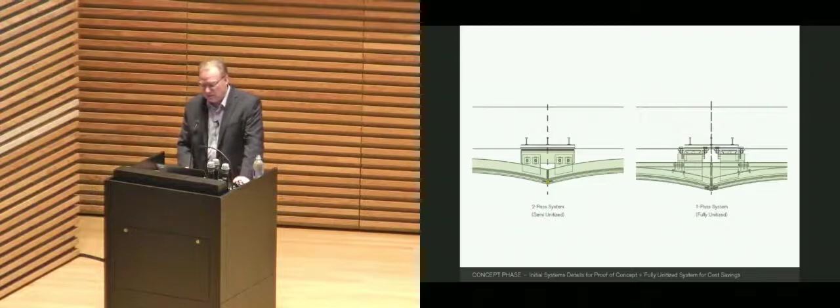And then the task downstream was a question of, can we do it? How do we do this? Which is an interesting thing, to actually have a very clear goal. And then the process is a different way of thinking about something than exploration, throw it away, exploration, throw it away. Here, the question is, okay, is it viable?

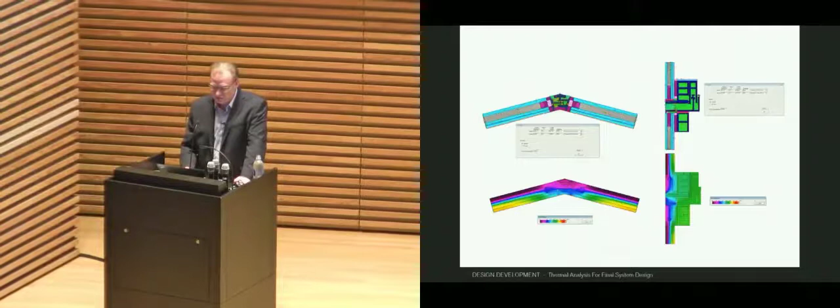What's the greatest risk? When you're working with a developer project, frankly any project, but developers are particularly attuned to this question, is where's my risk in this process? Because I do not want to get to the end of the process and have everything blow up for me. Either it doesn't work or it's out of budget. You've got to manage that whole process.

So you may be accustomed to the expression of Lloyd Hunt. Remember Lloyd Hunt? Lloyd Hunt taught us the 3 Ps: proprietary, performance, and prescriptive. Those are 3 forms of contracts, and 99% of the facade world actually works on the basis of performance-based design in the building envelope world.

And that's why the industry is so complicated, because you as designers and consultants are basically designing something that you hope to God a contractor is going to fully engineer and realize on the other side of the table, exactly fulfilling all of your aspirations. Now that is a dark art, to do that kind of handoff and transfer and to get everyone working.

Which is why things like design assist have come into being, where you basically say, in order to do that, we need to push the contractor further up in the process. Of course, the CM and GC, they're guaranteed, they're at the beginning of the process, and we all need them right there on almost any job now. Whereas the facade specialists, as contractors, are moving up towards the design development stage, and sometimes earlier, in order to get a kind of certainty in terms of the project delivery.

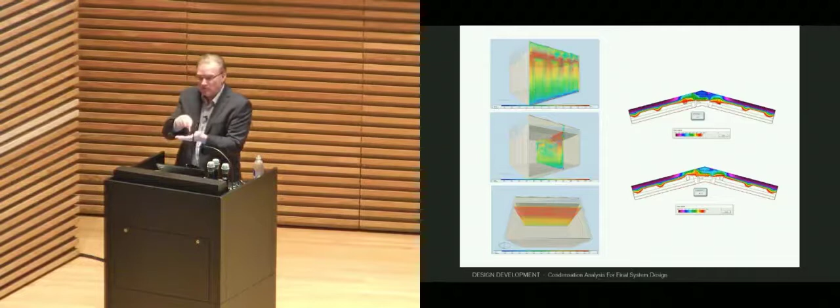But prescriptive design is like really old school. It's like 1950s curtain wall, when someone actually drew a line and they said, build that. And I don't really care if it works, but you're going to build that because that's what you're being instructed. Don't think about it, just go and make it. And then you kind of respect people for making it, hopefully well.

But these days, of course, you need all of the performance. So we, as a company, we're like a little industrial design company for envelopes. 75% of our work is for owners, but 25% of our work is for contractors and facade fabricators, whereby we do full prescriptive design and engineering.

So we just flip that into the normal working for Tishman Speyer, and we just say, okay, we are going to fully engineer this piece of glass. We just say, okay, how many layers? What is the energy performance? What is the aesthetics? How many coatings do we need? What are the sealants, the tapes, the laminates, everything?

We're going to figure it out one-to-one as if we are the sign and seal engineer of record, and we are going to comply with energy code, and we are going to do everything right from a fabrication standpoint. Meaning we're not relying on the contractors to tell us what the glass should be. And then working with Rex, of course, we figured out exactly what kind of coatings we want.

We have two. We have a hard coat silver that goes right to the edge on surface 2. The inboard is laminated. And then we have a sputter-coated low-E coating on surface 3 to meet the energy performance. By the way, the coating is the same coating that Dan Graham uses on his sculptures. Anyway, so moving right along.

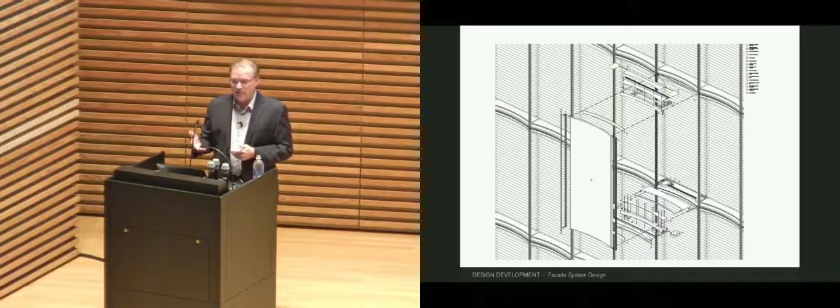But if you have a multi-story building with unitized assemblies, the economics of installation mandate that you do a single pass installation if you're working for a developer. If you have a big budget with an owner-occupied building, maybe you can do something a little bit more laborious, but single pass install. So how do you do a frameless glass panel where the glass is actually doing the engineering spanning work while having it fully framed with a drained joint pressure-equalized interlock system?

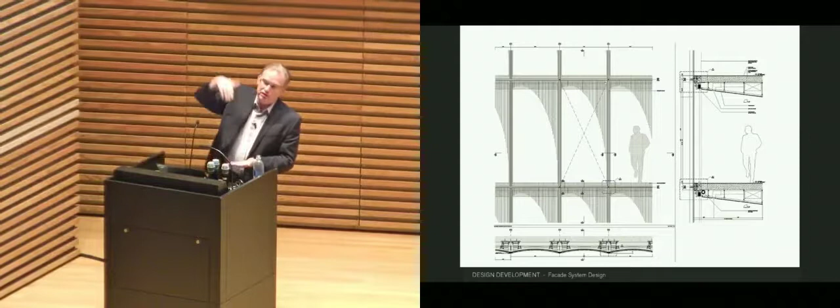And so this is not a frameless system, but it is mullionless. The mullion implies that the mullion has a profile that is actually resisting the wind, and the glass is only spanning sideways to the mullion. In this case, the glass is actually doing the work from top to bottom, which is not much of a miracle. We're doing like 30, 40 foot frameless panels now on specialty projects. But to do it on a commercial office building is pretty unusual.

And then the frame is actually along for the ride. It's bonded to the glass, not the other way around. But it is still a 4-side fabricated frame. And the key thing for us is that the tight tolerances of the fabrication of aluminum, which is basically plus or minus 1 to 2 millimeters, means that the glass tolerances for curved glass, which are looser, can be absorbed within the frame, but not at the joint. Right? So the frame, when it goes in, is perfect.

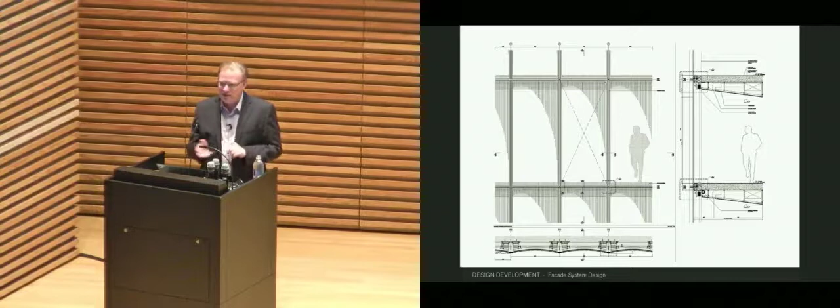The glass is softer. And this won Mr. Phillips, the Dark Lord's approval. He was like, that is the shit. Because you've saved me money, you've guaranteed the aesthetics, and no one's ever done it before. So this is great.

So here we have our joint. Now, one thing that you'll notice is this little thing here. It's one of the fine aesthetic details of this entire project. This is more Mies than Mies. With a unitized curtain wall, you typically have a reveal between the two halves. That's the I.M. Pei, the Foster way of doing things.

It's like the panels come together, there's an edge adapter, and then there's a shadow reveal. This is like, no, we're going to occupy the gap with a knife plate of shiny metal. And somehow it's the continuation of the curvature of the glass to that point of manifestation. Super sharp.

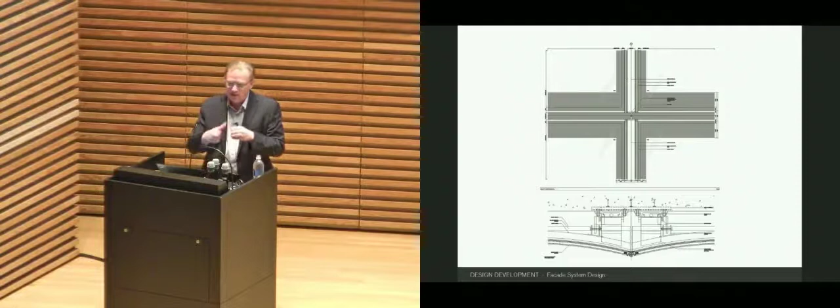That's what we want. So the unitized joint is actually deferred to one side. And of course, that knife plate is overhanging the way the joint works at a really tiny scale. I only have one slide like this in the entire presentation. I won't leave it up long enough for you to read. But now the moral of the story is, how do you take out that risk?

Now that we have a hypothesis, and it is a hypothesis, of a kind of unitized, mullion-less, prefabricated, curved glass, base-supported wall assembly. Most curtain walls are hung, right? This is base-supported. Now, with our prescriptive engineering for the glass, we went out to every curved glass manufacturer we know in the world, and we know them all, and we basically say, here's the product we want.

We want you to make 2 panels, identical, mount them in a frame, and we will pay you. How much money do you want to do this? We don't want to owe you anything. And they asked for $5,000 or $26,000 or $50,000. We didn't care what they were asking. And Tishman Speyer was enlightened enough to just pay them all. And then we went around the world to basically China, Spain, Italy, to look at these different pieces.

And theoretically, they're all identical, right? It is exactly the same coatings. It is exactly the same dimensions. But of course, those in the glass industry might appreciate that the anisotropic effects are different, the quench marks are different, the roller wave's different, the overall global warp and distortion in the panels is different, the quality of the butyl on the edge seal is different, everything is infinitesimally different. And it's not to say any one of these companies can't do a fantastic job, they can.

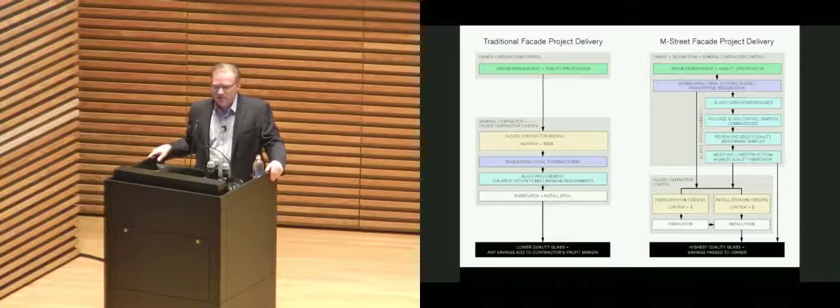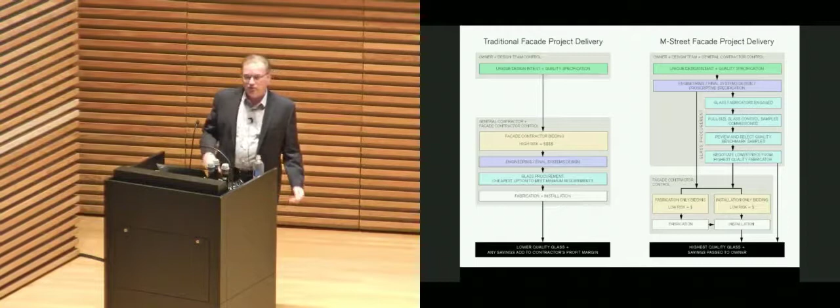Anyway, the fact is we got a number from $42 to about $86 a square foot. And then Tishman Speyer with the CM and with us negotiated it down to $36, and we gave the job to Tianjin Northglass. And they had the best quality glass, best quality with quench marking and all that jazz. And so then that 36 was put in our pocket, and then we bid the curtain wall. We went all the way through now to a fully conformed set of 100% construction documents.

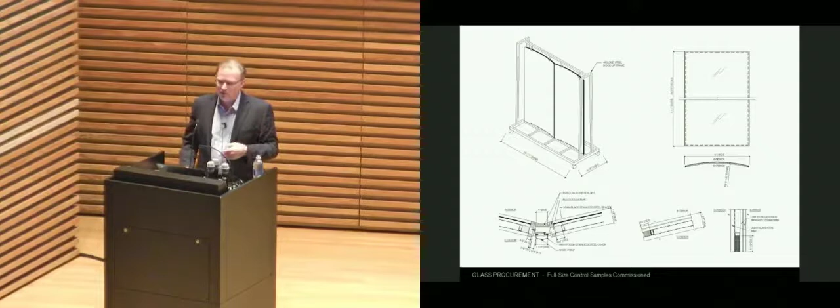Because we understood, we talked to various fabricators beforehand, would you still bid this job? Will you bid this job? Are you interested in this job? And by the time the bidding actually came out, we had 7 fabricators willing to bid the fabrication of the actual panels, and all 7 were willing to accept the novated glass supplier at the price. However, their margins and markups on that price were theirs. You want to put 15% on that, or 50%, or 100%, or 200%, that's your business.

You want to price their commercial non-performance, you want to price in delays to the project, you want to price in extra breakage, whatever you want, you can do that. That's your prerogative. And so we bid it out, and Alberto de Gobbi's relatively new company, Fabrica, won the bid, and in classic way, they're the lowest price, also with the most intelligent responses. We gave up a couple of details, like we allowed the frames to go slightly behind the back of the glass panels where the spacers were.

It was actually kind of useful because it's a nice point where you can actually dovetail an interior partition with the glass at that point.

So furthermore, to save money, the glass novation worked. We got the supply for a number that we couldn't believe. And then because Fabrica is relatively new and they didn't really have a pipeline of work in Washington, D.C., there wasn't really a benefit commercially to them doing the installation.

So the CM had very strong installer relationships and basically negotiated a separate contract on a cost-plus basis with an understanding of certain risks. They're indemnified against certain breakage, replacements, and things like that. So basically you wash it out, and you're breaking it up into 3 components, but delivering the final fabrication engineering as single source turnkey.

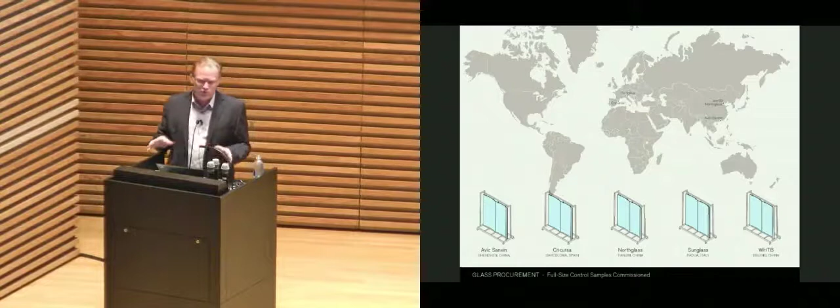Meaning even though we engineered it as though we were going to sign and seal it, they are still retaining an engineer in Washington who is going to sign and seal in that jurisdiction. So it's still, in a sense, performance-based delegated design, but virtually on a prescriptive basis. But if you actually look at the shop drawings, there's still a lot of evolution. To give Fabrica credit, even the bracket innovation that went on is pretty interesting.

So I'll just run through, now you've got the whole story. You can just look at this like a storybook. So this is a bending tempering furnace, which automatically CNC curves glass, which is now up to 3.3 by 18 meters globally, if you're interested. And we're pushing for projects now that have 18-meter long glass, if we can get it done.

So here's some of these rolling racks around the world in different factories. Basically the exact same thing. There's Josh and my guy Patrick.

And then, after we got the job done and went to Fabrica, we went through the shop drawing process, and now we are at the performance mock-up. So this is our performance mock-up now. You can start to see that knife plate manifest at the middle. The corner also has that similar detail. And then just a whole series of photographs showing the fabrication sequence.

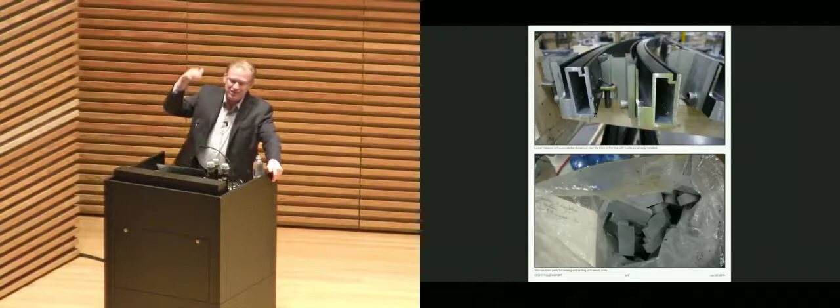Important to recognize that because it's a single spanning piece of glass, the structural silicone at the top and the bottom is about 2.5 inches thick, which they whinge a lot about the curing time of. But of course, it generates a couple. It's almost like you can imagine the engagement on a glass balustrade. So the couple at the top actually thins out the glass. So the substrates are still only 866. It's actually still very economical in terms of substrate thickness for something that's spanning unsupported over about 11.5 feet.

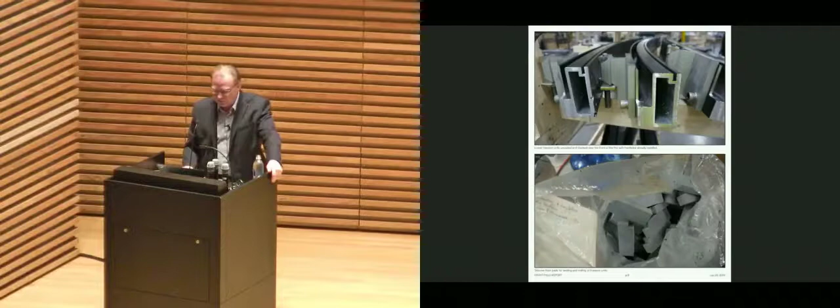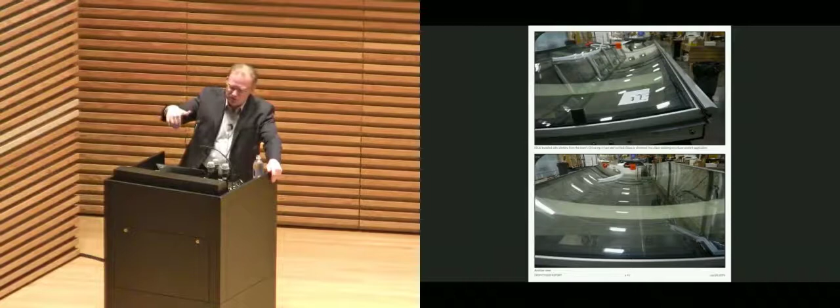But at the bottom, we have a stack joint. So even though the vertical is mullionless, we do still have a horizontal continuous stack joint that is fully drained. And what's interesting with the panel when it goes in is we have a very deep slide-in bracket that is torsionally stabilized. So when you first install the panel, it actually is rotationally stabilized against falling out.

Because most panels are hung. You hook them on, and then they're stable. This one, you're actually slotting it in the bottom, then dead loading it, and then dialing up the dead load afterwards. Anyway. So you can see the panels, 4-side, fully fabricated, curved glass. And then we're starting to get to the installation on site.

This is our beautiful bracket. Those are the curved horizontal extrusions with these slotted-in brackets that sleeve in so they don't rotate. And then you have the set screw which dials in vertically and locks in the dead load adjustment. Corner panels, typical brackets. And then the first real panel installations.

Now, while I'm showing you all these images, one of the crazy things about this project is Tishman Speyer assembled 3 sites, one of which was the CBS Face the Nation studios, which had to experience completely uninterrupted operations during the entire construction of the project. How do you do that? So there's a big site, there's the CBS studios, and there's another site. That site fit the CBS studios.

So you knock down that building, you build a new building, you move CBS overnight, which includes the new facade. The new facade was actually put on in this little localized area of the building. And then the rest of the building was demolished and built up over on top of it and meshed together. And then the facade was installed seamlessly as though the other building never existed as a separate building. So this is the kind of stuff we do to enable it. There's the CBS component of the project, built and installed first in advance of the rest of the building.

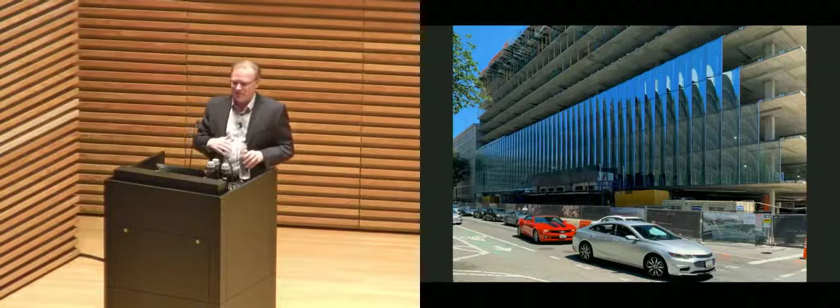So that was the CBS component over here, which has now been swallowed up by the rest of the building as it continues across. And I think the renderings were pretty convincing, but this is one of those few buildings where the optics of the real thing are just like, the fidelity is way beyond the rendering capability, and the real thing is nuts. In a way, the thing reflects the street and the clouds at the same time. And the glass actually starts to look kind of double curved.

I'm just going to leave you with this image for a moment because it's kind of unbelievable. Because of course the concrete is post-tensioned and it's coming to a thin slab and the ceiling is tapered up to that little point that actually fits within the stack joint location. And then of course when you see the corner, you get that incredible transparency of this frameless unitized system. And I've just never seen anything like that before actually.

Except for that, you know, what was that kind of speculative model that Mies van der Rohe made? Of that beautiful translucent thing, it's like, yes, nailed it.

And we should say, before we move on to Grace Farms, that the building was 100% pre-leased prior to construction by a single law firm above pro forma target. Yes, and that gets you the next project and the next project and the next project.

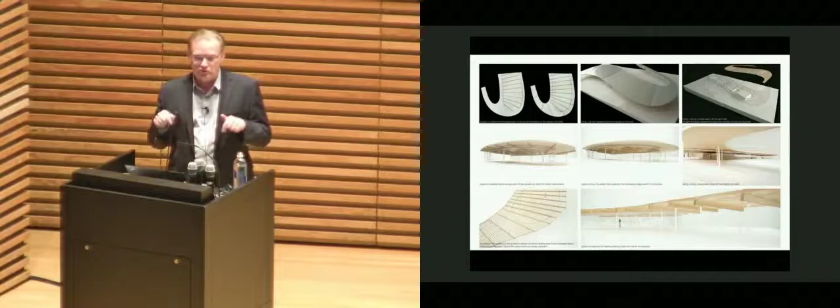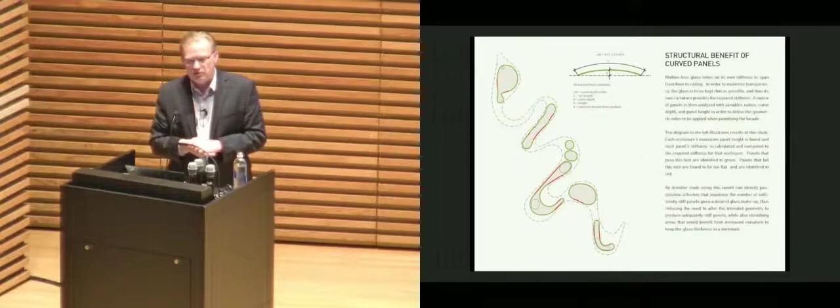It is insulated. Of course, we need the U value to prevent condensation, but we also have geothermal on this building, and we have perimeter heat coming up around the entire edge of the glass for comfort. So that's actually something that's working really well for us. Without the geothermal, it wouldn't make so much sense. So getting back into the glass. There's a radial curvature for the strengthening of the glass. That's all a good analysis, but I don't want to talk about that.

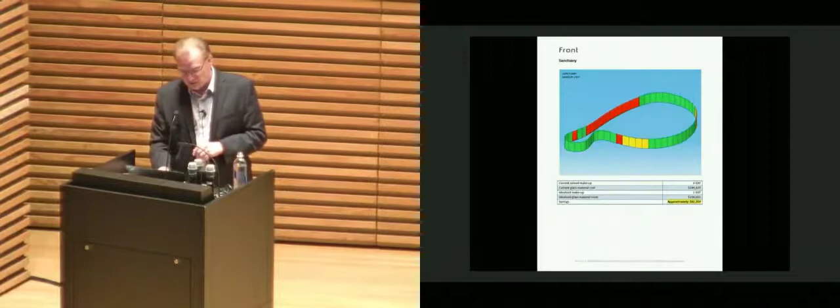What I want to talk about is this. If you were to just approach a glass fabricator off the shelf and say, I want a frameless piece of glass, like 13 feet tall, my wind loads are 2.5 kilopascals or whatever, this is probably where you would end up. Because what people are normally calculating is the heat buildup and the expansion of the air cavity and the in-plane forces on the structural silicone. And so what you're actually looking at is heat buildup here, pushing sideways, putting this into shear, and the length of this structural silicone is actually governed by the shear strength.

So temperature variation in here is critical. If you haven't actually analyzed it, everyone would default to the absolute worst possible case. You've probably heard about thermal stress analysis for thermal shock.

In cold climates, you have a direct sun onto glass, the glass heats up, and the rest of it's ambient cold. The whole thing fractures by itself right across the middle. It's also another reason why we never use annealed glass in cold climates, because of thermal shock, unless you analyze it, unless you really are in control.

And the great thing about low iron glass with no coatings in it is that it absorbs very little heat from the sun. The sun just goes right through it, or the radiation goes right through it. So the glass itself is not actually heating up that much.

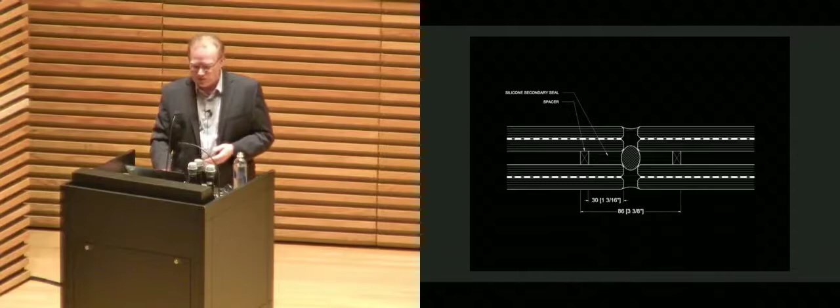We did very detailed finite element modeling to demonstrate what kind of performance this achieves. That dimension there is 86 millimeters, and the actual dimension here is 30 millimeters for silicone weather seal, structural silicone, and the spacer. It is the narrowest profile ever achieved for a frameless insulated glass.

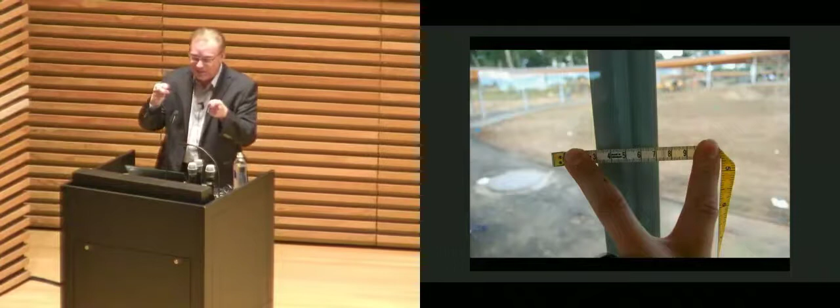I know it's a lot of caveats in terms of groups of checks, but we take our little wins where we can, right, because they're very nuanced. But for SANAA, this is it. If she had her way, or he, to give them both credit, the glass would ideally be a cast piece of undulating ribbon of glass. Can you make that? Not yet. I know Corning's working on their Willow Glass, but it's basically like crinkles whenever you touch it.

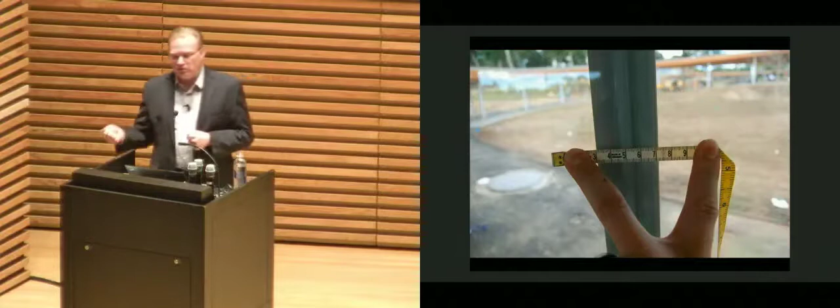Anyway, so 40 millimeters. That's based on the building geometry, based on orientation, based on the building physics of this, actually doing finite element modeling, looking at the cavity temperature range, calculating the in-plane stresses on the silicone, and actually working it out. Then getting our facade contractor, Roschmann, who is great, out of Germany, on board, and then getting Cricursa, our glass fabricator out of Spain, on board, agreeing that our presumption is correct, them doing their own calculations to verify that, and then doing empirical testing.

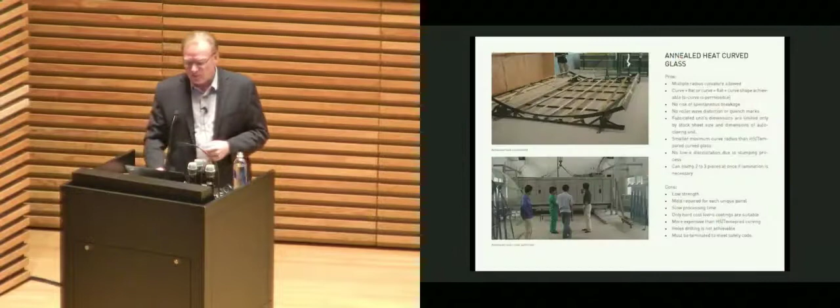So the owner would have to fund full-scale chamber testing, thermal cycling, to really see whether this glass is actually going to crack and fracture. And in the end, it's so far so good, knock on wood.

The panels are about 8'6" wide, 13 foot tall on average, but they kind of undulate and curve around. But I think that gives you the essence of the project.

Another detail I like about this project is it has a little cedar-faced gutter around the perimeter that just scuppers the water off the roof, like traditional Japanese style. And on the bottom, there's these little pits, little circles of gravel where the water just puts out, and then these happen in these kind of engineered locations wherever the low points on the roof are, which are really lovely.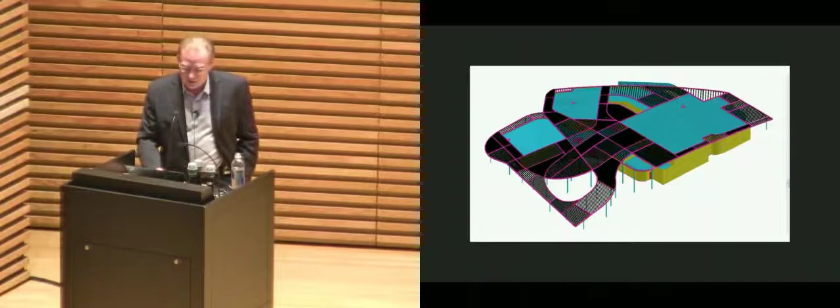And this is the Shrem Museum of Art. This is a very short little vignette. I won't talk so much about the design, I'll talk about the procurement.

This is a builder-led project, builder-led design build. Whiting Turner led the bid for UC Davis, that's how it was done. Soil with Bohlin Cywinski Jackson were the architects under that. We as facade consultants were part of the team, but we're over here. The team and all the other consultants were bidding the project through a design competition. We were on two teams, Work AC and these guys, and Soil won.

In this context, we were able to spread our wings a bit more, because Whiting Turner was in for a GMP with a guaranteed design, and they were looking for every possible way to reduce the cost of delivery. So for this project, we also did full prescriptive design under Whiting Turner. If we were under the architect, we wouldn't really be allowed to do that. With the Tishman Speyer project, we acted as though we did it in order to enable the procurement and then assign the responsibility. Here, we just did it.

Every one of these Toblerones is a self-structured element with a certain length. We have a splice detail that generates structural continuity from element to element. One of the real cost savings we found was that you'd have to fold this, weld the seam, pre-perforate it, and then post-anodize it after all the milling if we wanted to preserve it.

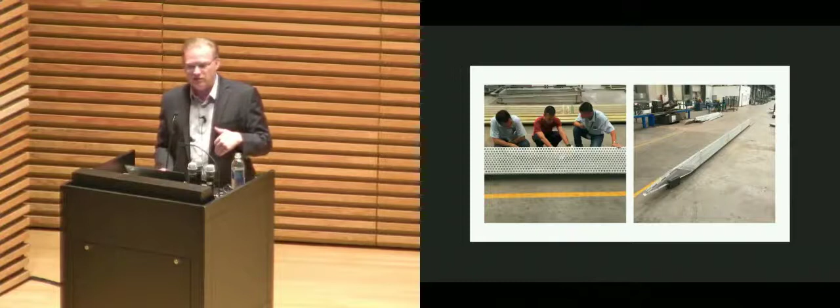So our investigations led us into marine-grade aluminum, a self-finished grade of aluminum. It's a little pricier, but when you net it out, it's much less expensive than the anodized handling after the fact. We engineered the whole thing based on welded marine-grade aluminum, generated all the fabrication drawings, and did the sourcing from a company called Program in Shenzhen.

We enabled Whiting Turner to essentially buy wholesale without us being in the stream of commerce, so we kept our noses clean without double dealing. Not that anyone really cares, but full disclosure is probably fine. In the end it kept things really clean. Whiting Turner was able to buy all the material, did all the steel locally, and hired an installer, saving a lot of money. It doesn't always work out that way, but it's one of the stories on this project. You can see the amount of custom fabrication detailing it would take to put this together, and the result is wonderful.

Okay. Anybody here Canadian? Only two? That makes three of us.

I asked my students at MIT what this building was, and they said, oh, that looks like it's in Prague or something, or it must be in Budapest. No, it's in Ottawa. It's awesome.

So the way we got this job is the professional practice part of the lecture. If you're a young intern working at a firm, don't piss anybody off, because one good turn deserves another. When I was about 20 years old, I did a one-year internship at KPMB Architects.

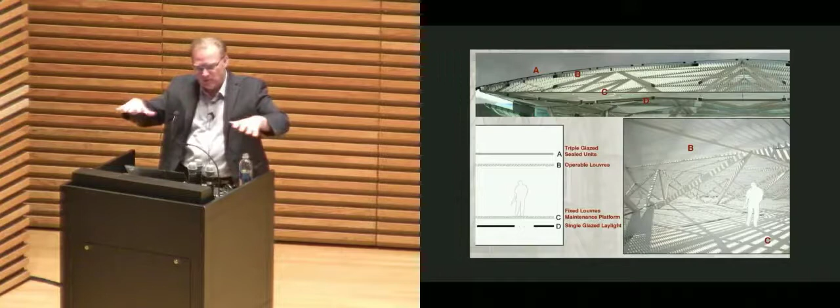It's quite beautiful. And then we have those two layers that we sandwich together, and somehow inside the space reservation offset creates the geometry of that steel structure.

So the steel inside the attic is generic wide flange kind of steel, very simple steel. And then the inside is all complex welded architectural steel.

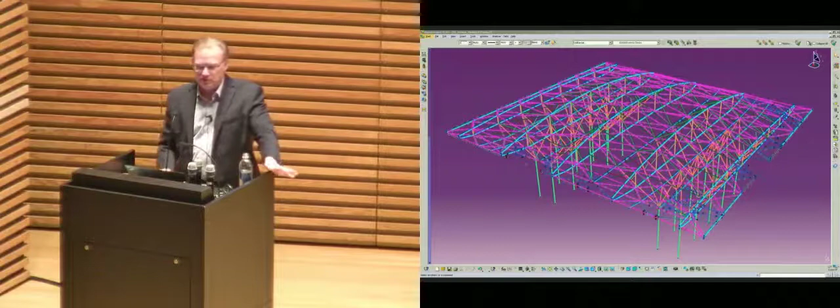So we did all the BIM modeling. We did all of the drawings, 100 sheets of CD details. We didn't do the structural engineering for the roof, but we did all the structural modeling for the roof, because this modeling exercise was outside the capacity of the structural engineer we were collaborating with, which is Nebojsa Odrovic.

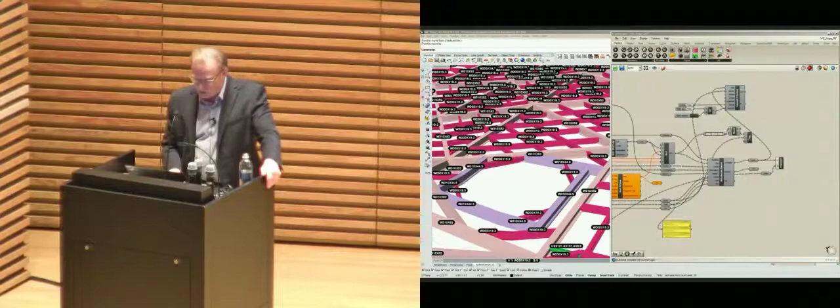So very quickly, of course, all of this was a kind of Elefront, Rhino, Grasshopper kind of flow, and then give you some sense of the kind of exploded perspectival axes sort of the various systems.

Now just as I go on to this, I'll start talking about the procurement. So this was 100% design, bid, build. So 100% conform construction documents, with PCL as the general contractor, and a full handover to a facade contractor, which would handle the steel as well.

The way that was done is they did a very rigorous pre-qualification process, and we thought we'd get quite a few people, including North Americans, but in the end it turned out to be only two companies, Gartner and Seele from Germany, qualified to do the Canadian Parliament.

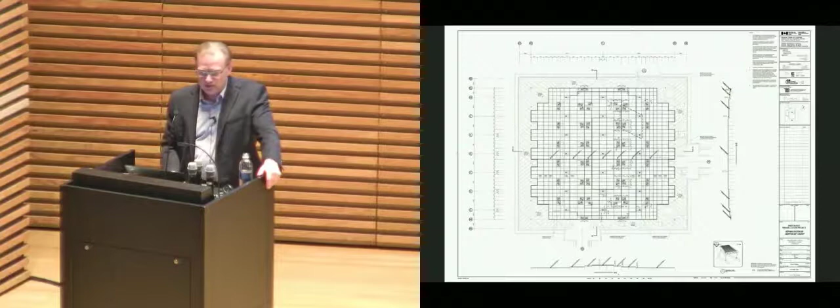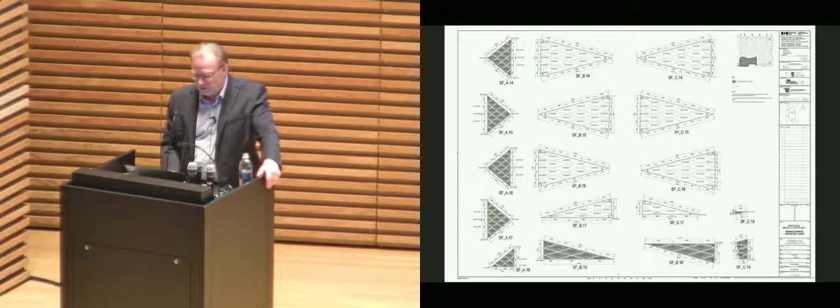Seele won based on cost, but what you're looking at here is, of course, this is delegated design, but basically to rhetorically tell the contractors that we understand our geometry perfectly, we documented every single panel in the roof. We put it into a totally rhetorical data dump onto a 2D paper sheet that no one could read, because the actual contractual deliverable was not the model or Excel data sheets, it's actually just paper.

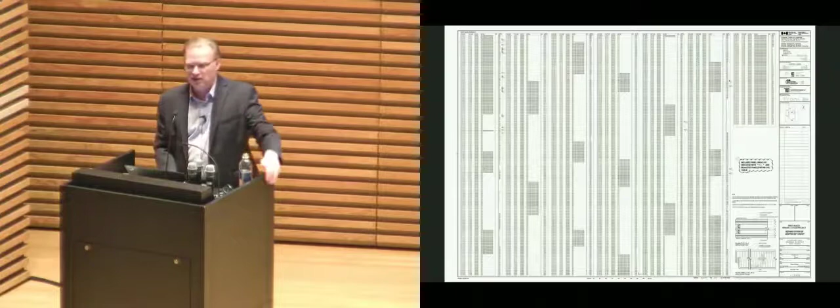Of course, the first thing anyone asked for was, by the way, can we have the Excel version of that file? Indemnified fully, can we have your model? Yes, but we all anticipated that we would hand over all that stuff, but of course, without the responsibility for it, which is kind of like, unless you're doing a truly integrated project, contractually, it's the way you have to do it.

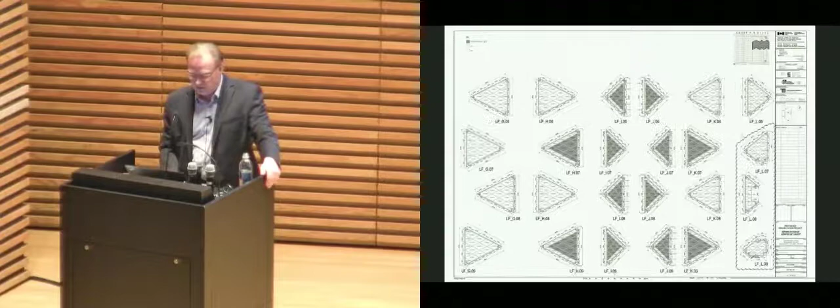So these are all the lay light panels. There's 13,500 of them. And then here's the list. And this is the bid pack.

And then there's the roof, which is kind of like the Seattle Library. It has 3 lines of defense, except instead of a mechanical pressure cap that's outboard of the glass, this is such a low slope that it's still 3 lines of defense, but the pressure cap is flush with the surface of the glazing. That's to prevent any kind of accumulation of water or snow or ice, and to allow all the water and ice to drain towards the edge condition.

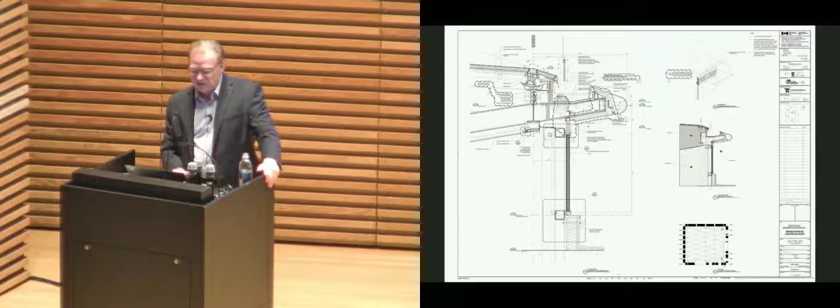And here's the gutter, which is a massive gutter, which has this cantilevered stainless steel plate that prevents the glacier from basically pouring off onto the existing roof. And then this has 6 lines of heat trace, and it takes all the water back to the inside of the building.

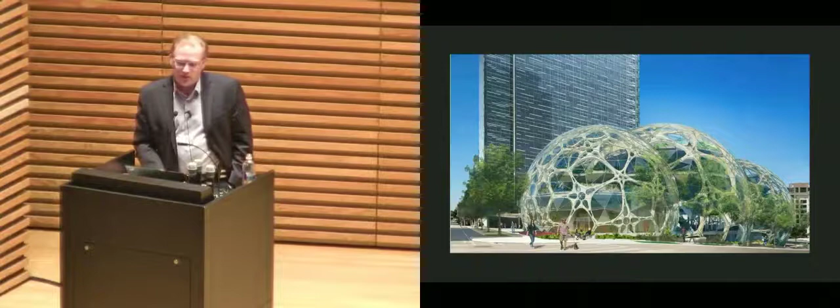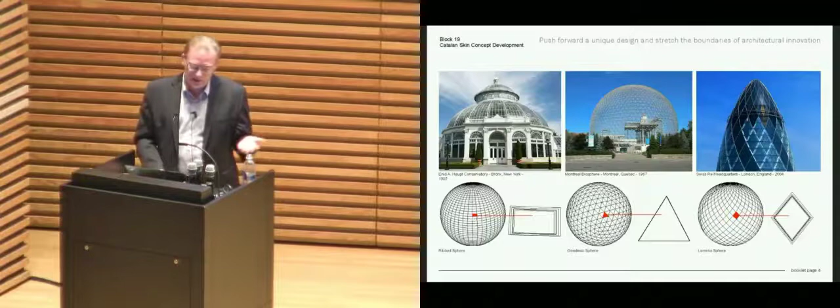So Amazon Spheres, we did this with NBBJ, but we did it as a team with Magnusson Klemencic. They wanted all the consultants to pitch as integrated services, so MKA employed Front as a combined primary structural and envelope consulting team. And this was explicitly meant to be design-assist, so at the end of DD we had Enclos come on board to the project.

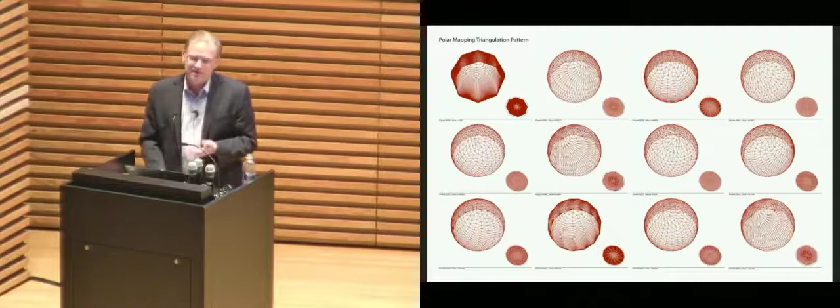And so I'll try and go through this very fast, but Jeff Bezos and NBBJ were working very closely on, he expressed an interest in some kind of Kew Gardens, Victorian greenhouse type of environment, but at the same time something that was contemporary. And these are drawings that we did, basically every type of mapping of a sphere that you could imagine. Eventually it's a Catalan solid, which is kind of like a soccer ball.

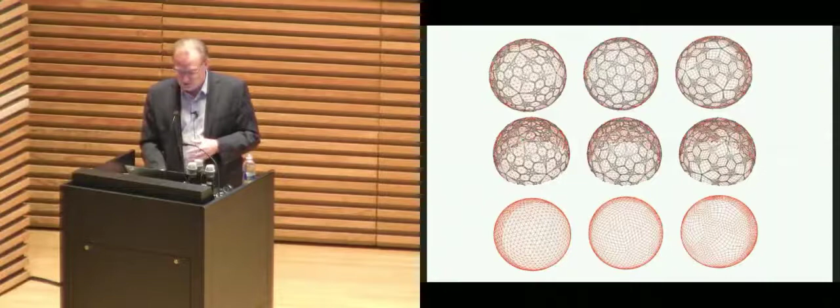Developed into this kind of pattern, and then NBBJ did all of these variations on Catalan skin until we basically had a basic configuration. And then you'll notice the glass is actually not curved, so it's not a spherical element, it's all flat, and it's all triangular and trapezoidal nested together, and in some ways it's actually not all concave. It actually oscillates between concave and convex depending on the geometry, which gives it this particularly interesting crystalline rendering of the form.

Of course, in the big picture, Apple will spend whatever it is, $3,000 a square foot on the entire square footage of its entire headquarters. Google will invest about $600 a square foot in what is a glorified Costco, which we worked on. And then you have Amazon, which says, we're going to build completely conventional grade A office buildings, and then we're going to spend 5% of our budget on one iconic element that is just basically a glorified cafeteria and lounge for our workers. But I tell you, Amazon got more mileage in the media out of this than I think Apple or Google did for their massive investments.

I mean, this is Bezos being incredibly strategic about his iconic investments. And it sort of fits into the Amazon brand of basically being seen to be modest from his investors' and shareholders' standpoint. So what was interesting is when Enclos started to make submittals, NBBJ and the team were saying, well, there's no way to validate any of this, so we can't comment on it. And so Amazon and their owner rep, Seneca, said, well, we understand that contractually, but we can't accept that. We need to have it validated.

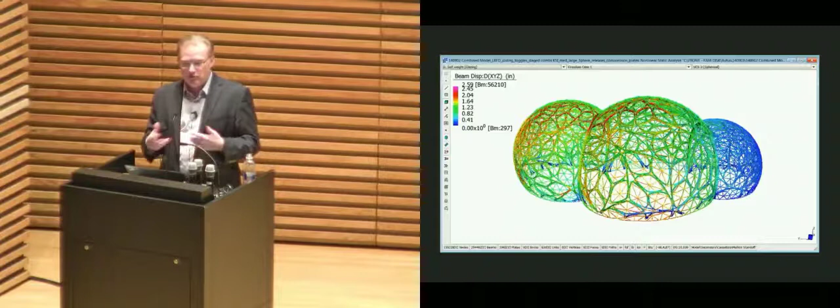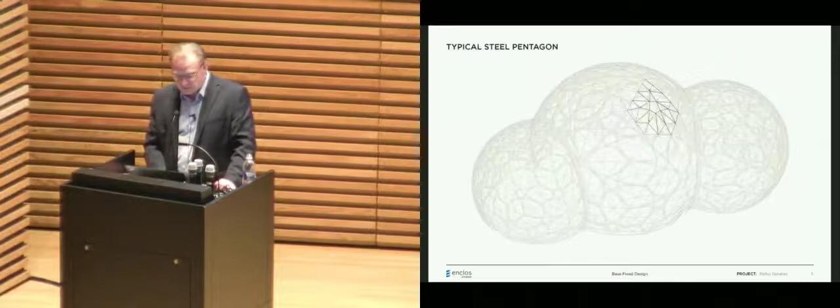And this was a very nice symbiotic relationship going back and forth. And eventually, everyone agreed, it was all working. But part of that process is, because these are crazy, this is a kind of trial assembly mock-up. But we also went to a full-scale performance mock-up. And the full-scale performance mock-up was interesting because we were like, who's going to determine that? And then everyone said, well, you guys should.

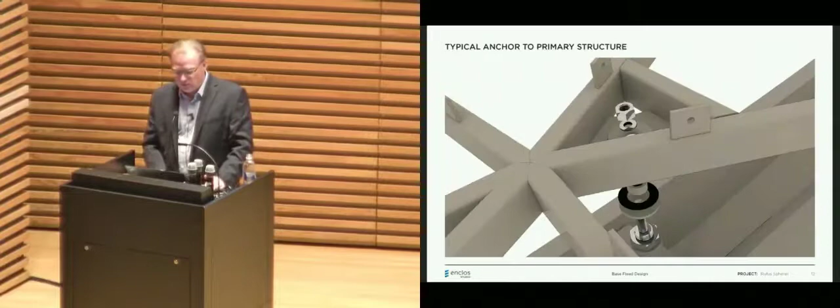And we're like, okay, so we've got the analytical model. And what we're going to do is we're going to basically data mine the analytical model to find every element that is at its maximum stress. And then we're going to create a Frankenstein mock-up that basically tests all of that and determine where it's going to be hydraulically jacked in order to do it. And so we worked out what the performance mock-up should be, which is basically this thing here at this angle.

I won't go into the whole building physics of this. It's a whole other story in terms of climatic control, humidity level, what's good for humans, what's good for plants, what kind of plant selection could actually be in this building to create this kind of environment. It's basically high altitude equatorial, if you need to know the kind of bandwidth for the plant selection. Think the mountains of Borneo.

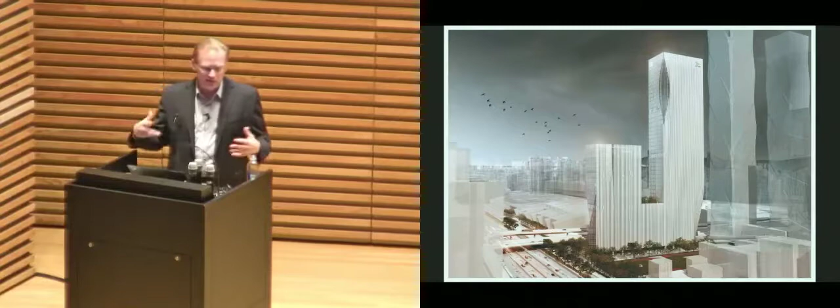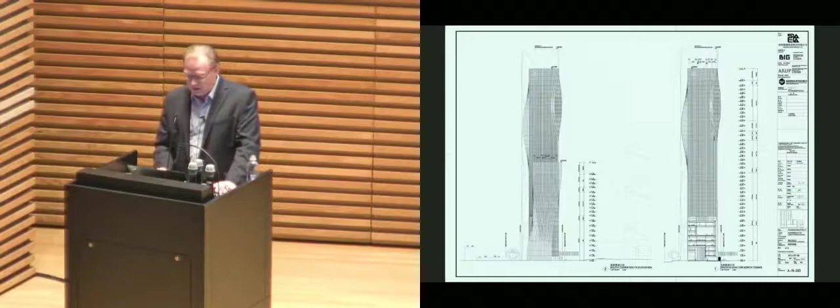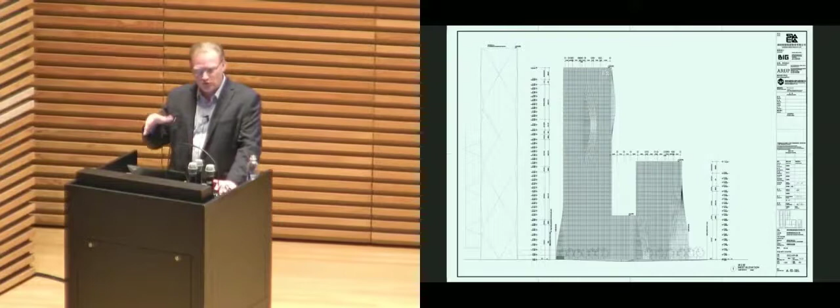So these are the elevations and sections with these kind of crazy undulations, but totally systemized, and then of course you completely wig out. And of course it's all flat panelized assembly, cold formed into place onto geometries that are actually truly double curvature. So it's actually not all cold formed glass, it's actually all cold formed curtain wall, which is pretty unusual.

This is like Terri Meyer Boake, sacred geometry. Sorry, inside reference.

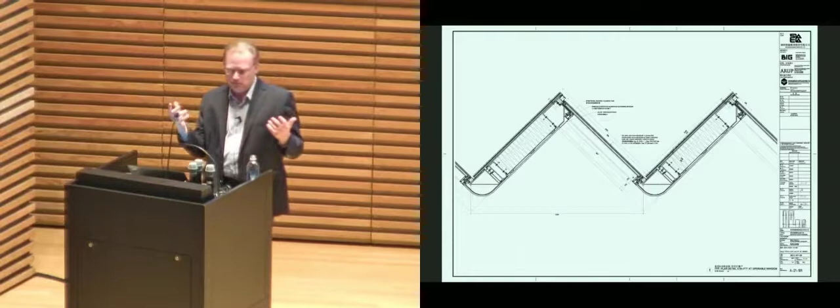And then the details are cute. I love these kind of radiused interiors because this is like a bamboo veneer hook-on material to basically abstract its curtain wall-like quality, and then you just have these glass panels. And they did all these beautiful one-to-one mock-ups with Chinese classical painting wallpaper on the panels, and of course over multiple panels.

When you look at it in one direction, it creates that kind of lovely image. You know, it's a way of pitching it to the client, but actually it looks pretty remarkable, and for a curtain wall, it's not that common. Anyway, I like these drawings.

These are the corners, and then there's one where we start collapsing the geometry, which gets pretty messy. From here, you can see it actually begins to collapse to nothing. But that's what you need to do. You need to draw all the instances in order to figure these things out. We kind of can't believe they built it, actually.

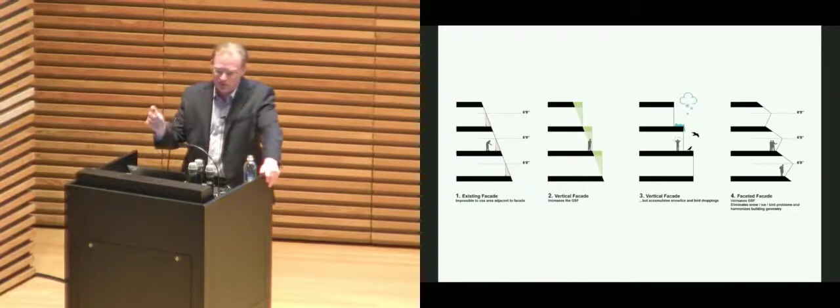But it does have some qualities. It has high floor to floors. It has this interesting waffle slab throughout. Then it had this weird stepping, of course, with these large precast facades with strip window clerestories. And eventually Brookfield said, okay, well, we're gonna reskin the entire thing.

We're gonna double the size of the lobby and do all these things and re-elevator the building and do some upgraded mechanicals while it's all tenanted. So that's why this project had to be also design assist, because means and methods become really critical, moving the contractor forward. So we had Permasteelisa brought in at the end of design development to work through a 10-month construction document phase. Adamson was the exec.

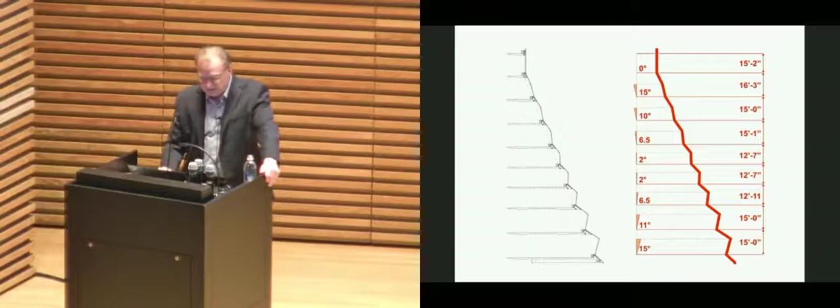And so again, the hypothesis here was that we would attach a conventional but folded unitized curtain wall system, like with this kind of geometry, where one of these would be a single panel, and it would be steel mullion reinforced to an aluminum section in order to span from here to here. Now, the floor to floor, the column spans about 30 feet, and you would think this building is strong enough to handle a curtain wall, right? Well, it's not.

What we discovered was those precast panels on the wall were basically diaphragms that were spanning from column to column. They only had 4 points of connection, and all the loads went axially straight down the column lines. And the actual slab edge was only like 15 inches of concrete spanning 30 feet. It couldn't actually take the weight of a new curtain wall because it was never designed to take anything at all whatsoever. And so we were like, okay, well, all that precast got to come off. So how are we going to hang this curtain wall?

Well, we basically trimmed every single floor plate with a new piece of steel that replicated the load transfer of the original precast, which means we collared the columns, we x-rayed the rebar, we drilled in around where the rebar wasn't, and then we spanned that new steel. But the genius of that, as everyone discovered after the fact, was we could pre-engineer every curtain wall bracket onto that prefabricated steel, all verified based on site survey, and the installation went so much faster than anyone thought. And the disruption to tenants was absolutely minimal because you've got 8 times less field drilling or coring through the slab to make all these reinforced anchors, which is often what you do.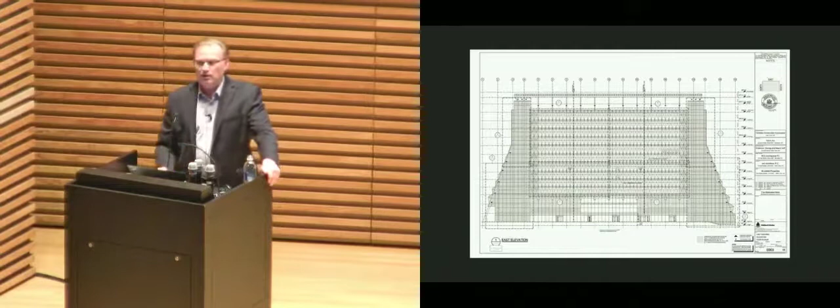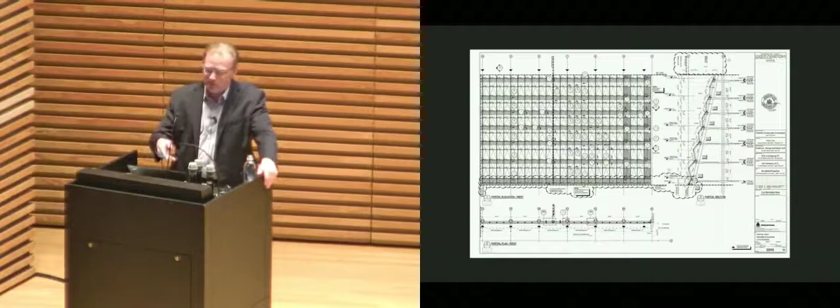Anyway, the moral of the story is the whole thing was done for about $60 million. I am privy to the numbers, but I can't share them with you. But suffice it to say, Brookfield made a ton, an absolute ton. And surprisingly, 100,000 square foot floor plates are in demand. You wouldn't necessarily think it, but Amazon came in, they're not going into Long Island City, but they took 3 floors in this building, 300,000 square feet. And so the whole building re-rented out way above their pro forma targets.

And now Brookfield, I don't know if you know the building, but 666 Fifth Avenue, it's this beautiful 500-foot tower on Fifth Avenue that the Kushners were going to tear down and have Zaha do a 1,400-foot tower. So they had some financing issues, and that went away. They sold the building to Brookfield Properties, and Brookfield said, we're going to reposition it. They hired KPF, and we got that job. And now we're looking at doing an 800-foot full reclad in Lower Manhattan. And it's a really interesting thing.

Of course, you guys are all aware of the upgraded energy codes in New York City, which are really hardcore. It's mandated, basically, now you have to start recladding your buildings with much higher performance envelopes, with all the bells and whistles, with better window-to-wall ratios, with kinetic systems, and so forth, in order to avoid paying, eventually, a carbon tax moving forward, which is going to ramp up from 2025, 2035, 2050. Anyway, so it's a really nice building.

This is crazy. It so happens in New York City that you have to do an integrated building maintenance unit track if your building is not orthogonal. So because this building folds, we did the first integrated curved concealed track in a folded curtain wall ever. And that's what this mock-up is. This is the integrated track that gets swallowed into the curtain wall mullion. And for anyone who's a geek out there, we basically push the air seal line back, like a race car, so the track could go to the outside and then corner around the air seal line, all in the drain joint cavity to the exterior, so the track could go through it.

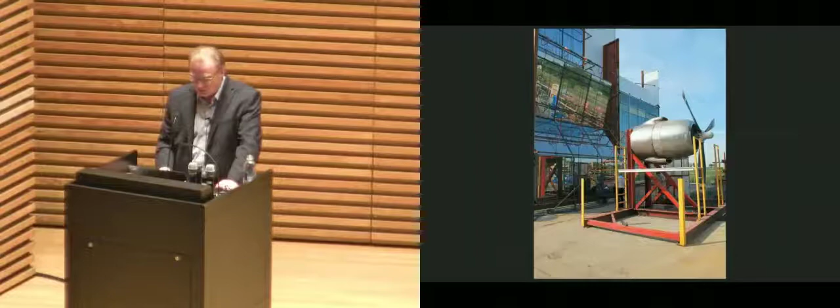Anyway, this is being done in Spain. It got approved. This is our visual mock-up up in Permasteelisa's factory, which is on a rotating turntable, which is quite nice. So you can see your mock-up from any given angle of the sun, snow retention tracks, and their airplane engine test. This was done up in Montreal, and then the curtain wall fabrication up in Hartford, Connecticut. And then the installation. So here you can actually see the additional steel beams with the pre-engineered bracket locations.

And then the whole thing is all done, all opened up. I mean, no one would ever design a building from scratch like this. So it had to be a reclad. So I'm just going to show you two more things. This one's a brief one.

This is a commercial office building in Calgary. It's the tallest building in Western Canada now at 250 meters, 247. Also by Brookfield, but this was done design, bid, build, hard bid. And it's a very similar story to the Tishman Speyer one. And believe it or not, Fumihiko Maki and Foster were in this competition, but they got beaten by Earle Arney of Arney Fender Katsalidis out of London, teamed up with DIALOG. And he proposed a really friendly developer building.

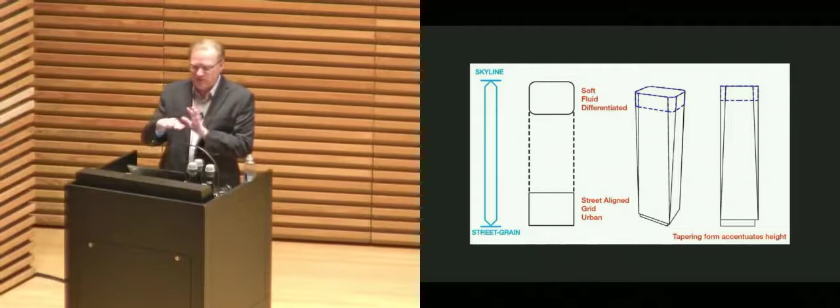And you know, most, kind of like all the World Trade Center towers today, go floor-to-floor glass with a kissed transom that's concealed behind the glass, still with an insulated transom, but the glass is always going floor-to-floor, into the 13, 14, 16-foot ranges. So this building does that, and then in that concealed zone above the kissed transom, it has an integrated shadow box. So it's very elegant, but the key point is 92% of all the panels are completely rectangular, vertical, and standard.

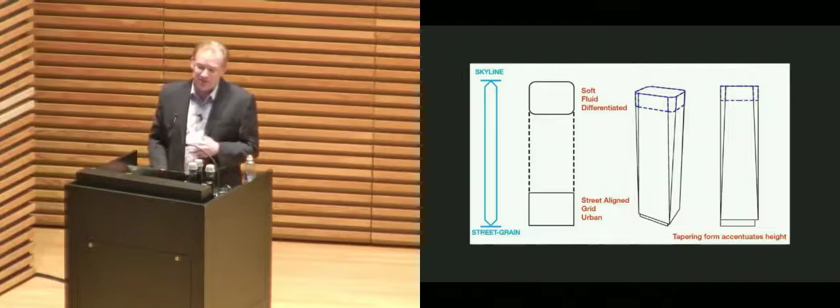And so even in the Canadian market, with the 25% discount for the Canadian dollar, Oldcastle won this bid, and the basic curtain wall came in at like $76 a square foot. But the corners are all conic. So we go from a super tight radius, widening up to a 5-meter radius at the top of the tower, and then we resolve into a radius crown that comes back down. And so that one part there is more like $300 to $400 a square foot.

And so again, Brookfield, riffing off of the Tishman Speyer experience, said, well, that's our risk. So again, the tail wagging the dog, you have to be able to do conical curved glass in a bending tempering furnace of this scale with floor-to-floor height glass, with an aesthetic that they accept, a color rendering index they accept, and a solar heat gain coefficient that they accept with a VLT that they accept. It turns out there are 3 coatings in the world that met that criteria. It took a lot of research to get to that point and dial it in.

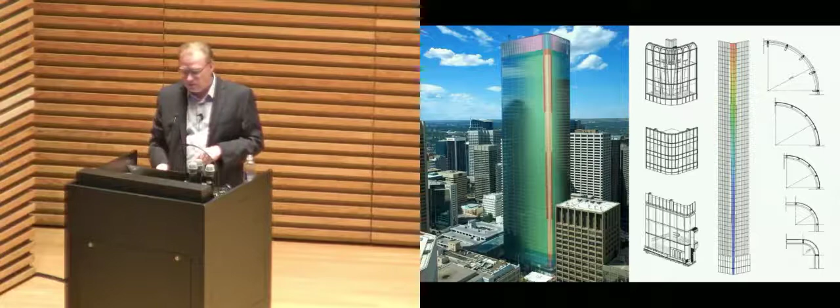And then, of course, they did commission the same glass companies around the world to build mock-ups. And what they wanted to see, and maybe just to make the point, is Brookfield would never accept the flat and the curved being even a slightly different coating. The idea that you would actually read the legibility of the corners being somehow even slightly different, no chance. And that's a pretty enlightened point of view. And so you had to nail the corner curved glass, and then it had to become the flat glass.

And so all the glass was supplied, I think in this case, by AGC Europe, and then Cricursa did all of the curved glass. I believe Interpane did the flat fabrication, and then it all came together basically from the same batching. So here's the mock-ups we did here. We did the 3 different coatings from 3 different manufacturers. We did 1 curved conical panel and 1 flat panel, also to see whether those coatings would experience any optical differences from flat to curvature.

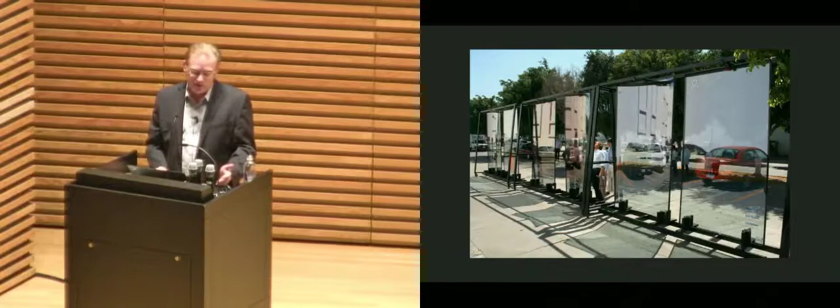And that was actually quite interesting too. And in this particular project, European fabrication proved to be neutral with Chinese fabrication. There wasn't actually a difference, which was interesting when you drill down on the numbers. There is a kind of global convergence in terms of the price of glass production and automation, even though there can be huge variation in the way people quote things.

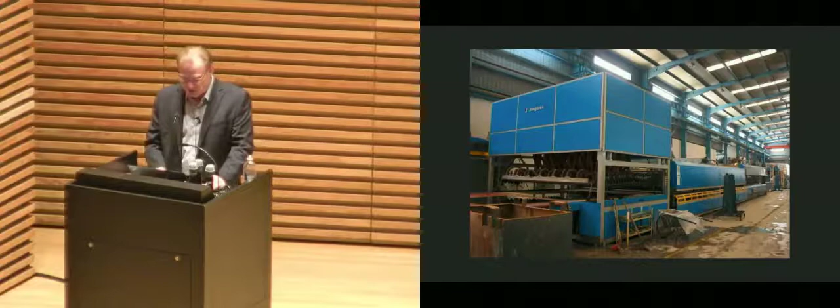So these are the curved panel fabrications being done. Actually, this is done in Florida. So most of the rest of it was done in Canada. And then we had our performance mock-up. And then the actual tower installation.

So it's kind of been recognized as a shockingly disciplined tower with a World Trade Center 7-like transparency. It oscillates between being transparent versus being reflective, because the reflectivity on the glass is only about 22-23%. Whereas, for example, Maki's World Trade Center 4 is 45% reflectivity. Basically the building is like a stealth building because it literally reflects everything around it. You can't see the building itself, which is kind of awesome.

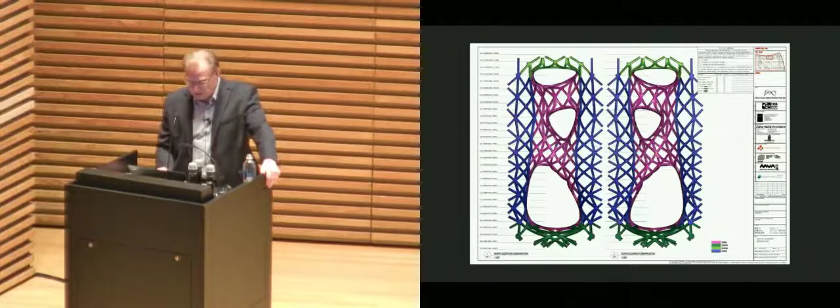So we are taking a design surface from Zaha's, and we're taking Buro Happold's steel model. But now we are on the contractor side of the table, so we are now owning that. And we're now doing a complete engineering of the painted aluminum cladding, all of the rationalization to flat, single curvature, double curvature. We're working within the constraints of panel fabrication sizes, how to actually stud weld all that stuff, and how to subframe it all, and how to fabricate all that curvature, and lock it down onto the steel, onto like a constellation of literally thousands and thousands of custom welded cleats that have to go back on that steel. So we're in a place of basically owning the primary steel fabrication drawings, not the steel connection detailing.

That's actually being done by the steel fabricator, but they are then sending us their data, and we are adding all of the welded cleats to it, which then go back to the steel fabricator, for them to weld it on faith that they're going to do it all correctly. And then when we come to site, all of our prefabricated panels lock and hook on correctly. And that actually was done beautifully.

Now this process, I mentioned Elefront a couple of times. That's just our own in-house Rhino plugin that we've developed over 10 years because we used to do a lot of design build, we self-perform a lot of work, and we sort of funded the evolution of tools for automation. Essentially, it's available for free on Food4Rhino, so all of you can play with it if you want. There's some other tools that do some similar things. It's not exclusive. But we put it out there because we figured, we're not a BIM software company. We don't really want to be in that kind of business.

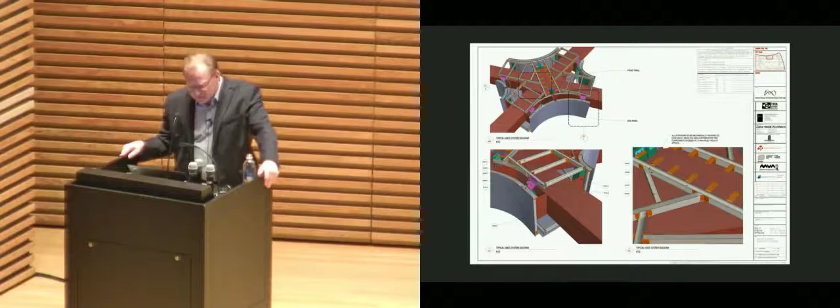So the point about Elefront is it's basically a tool to attribute properties to Rhino objects, to create databases, to enable the interrogative overlay onto databases to extract subsets of data, which then we can hand out to other people to do different things. Also working with document templates, we can automate the creation of drawings. So we can make 10,000, 100,000, 1 million drawings.

For this project, we have 1.6 million parts, including the G code. And all of that, we only had a team of 5 people, and if you didn't have automated tools, and if you didn't understand the associative rule-based knowledge of the system that you have designed, because it is that kind of industrial design domain that you need to own for any of those tools to actually really have any utility.

Most architects are limited to essentially geometric rationalization and space reservation as an offset for clash detection. But most architects are not detailing the actual sub-assemblies, the engineering of panel thicknesses and welds and so forth. So that's why it's not appropriate to do that on the owner side. It's appropriate to do that for the contractor, where it has the need. But without those kind of tools, I don't think this really could have come into fruition.

So a drawing like this is automated. We're not drawing this drawing. We're programming this drawing, and this drawing is being created out of data sets. And then, of course, again, my favorite expression of BIM pornography, all of these images are completely rhetorical because they themselves, as representations, have no utility except to communicate to you rhetorically how complicated it is.

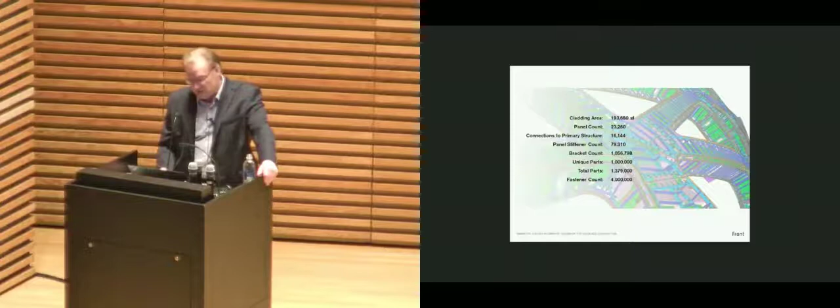And so here's some basic data, 193,000 square feet, 23,000 panel count, 4 million fastener count, 1.38 million total parts. Anyway, you get the picture. But that is the future.

But the point that I did make, and I'm going to reinforce, is that the tools are only really powerful when combined with, I'm just going to say generically, domain knowledge. And I don't care whether you're dealing with space syntax or you're mapping the kind of psychological properties of spaces on children or whatever it is that you're doing, you must have real domain knowledge and expertise and an understanding of all of that criteria in order to start utilizing these tools to actually kind of automate it.

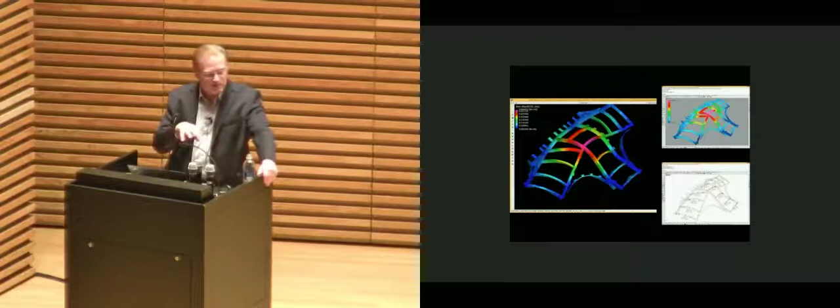And this is where the Katerras of the world, the WeWorks of the world, actually will put these tools to good use because they are vertically integrated. They understand that the future workflow comes from owning the design of something, right? It's a very interesting space to be in.

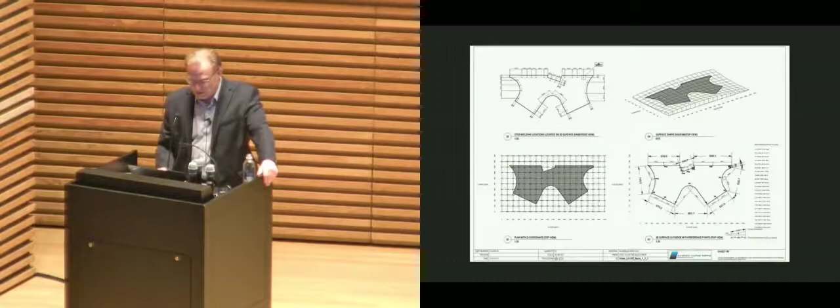And with that, I'm going to stop and say thank you.